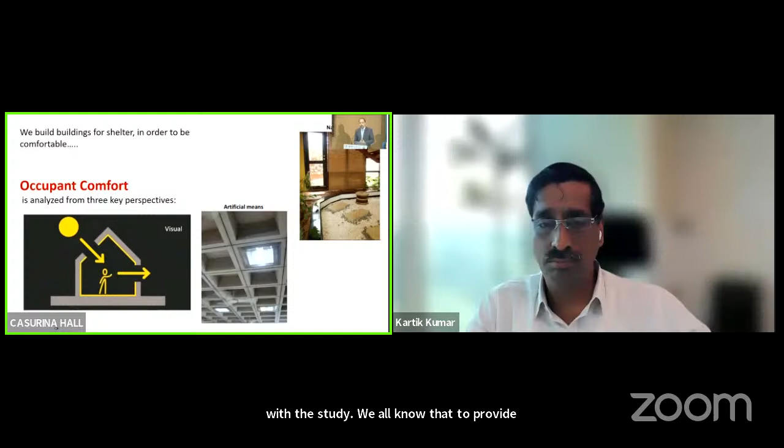Developing this daylight plugin tool with the measured sky condition of India is particularly the main intent and objective with which we started the study. We all know that to provide occupant comfort, visual comfort is one of the key components we have to address in a building, and it is addressed through two means: one is artificial lighting, and the other is natural lighting, which we get from the sun.

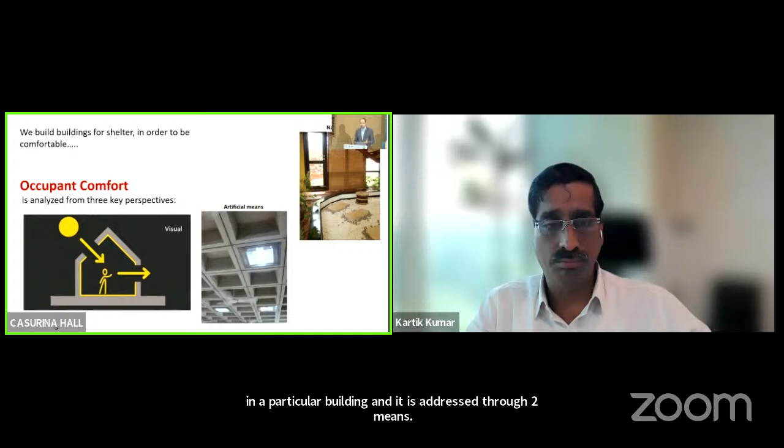We have seen in the past from our vernacular architecture that this was very well addressed in our buildings, where daylighting was the key source and we didn't have artificial lighting. It has just been 100 years since we were introduced to artificial lighting, but before that, daylighting was something which was very well addressed.

Now, since we have the option of artificial lighting, we have started exploiting it, and we have started creating buildings full of glazing, without realizing what the interior spaces are going to be like and how they will behave in terms of our own internal comfort requirements.

In some parts we find that places very close to these glass facades have ample daylight, whereas in certain cases the lighting levels are very low, so you need to turn on artificial lighting systems, or turn on the blinds because the daylight levels are quite high.

Under such a scenario, what ultimately happens is that we are leading up to sick building syndrome. I believe more than 50% of people will be consuming vitamin D tablets every week, and the major reason is that our exposure to sun is now reduced very drastically, because most of the time we are indoors in our offices and schools, where we do not get this exposure to daylight.

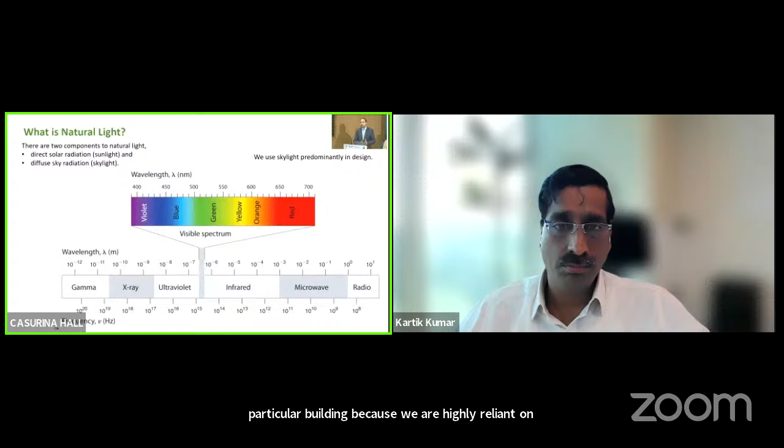This is certainly leading to a detrimental impact on our health. At the same time, it is also increasing the energy consumption loads of our buildings, because we are highly reliant on artificial lighting systems. Now we need to first understand the physics behind this: what is ultimately happening, what is the main source or cause of the problem, and how we can find a solution.

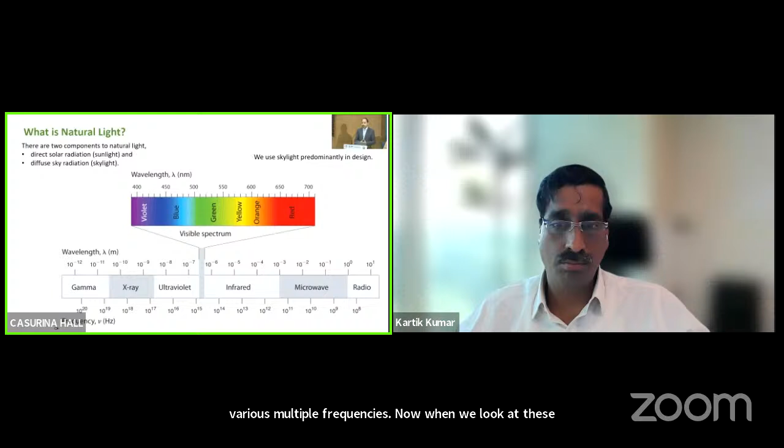When we look at the natural light coming down to us from the sun, these radiations are divided into multiple frequencies. There is a very small window known as the visible spectrum, also known as VIBGYOR. This is the only visible spectrum, a very small window, which carries daylight.

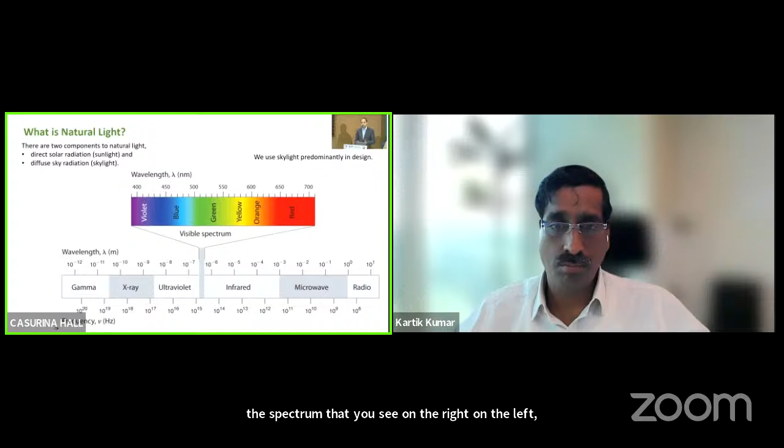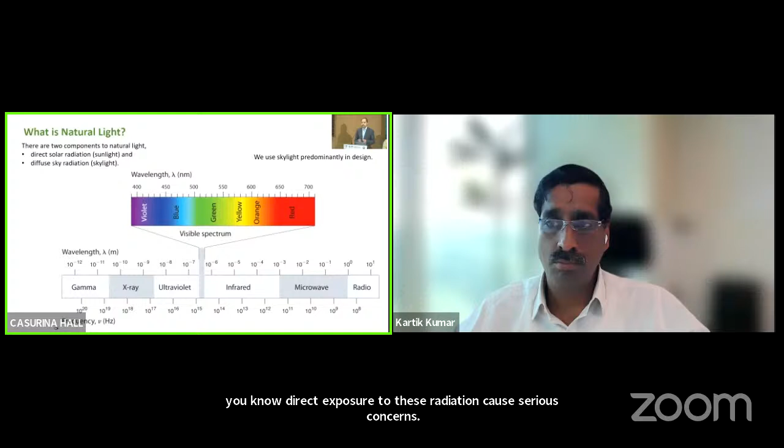Apart from that, the spectrum you see on either side - gamma rays, X-rays, ultraviolet rays, infrared radiation, microwaves - we all know these are very harmful radiations, and direct exposure to them causes serious concerns. They also carry a heat element which gets trapped in our buildings, and to exhaust this intensive heat we are reliant on air conditioning systems.

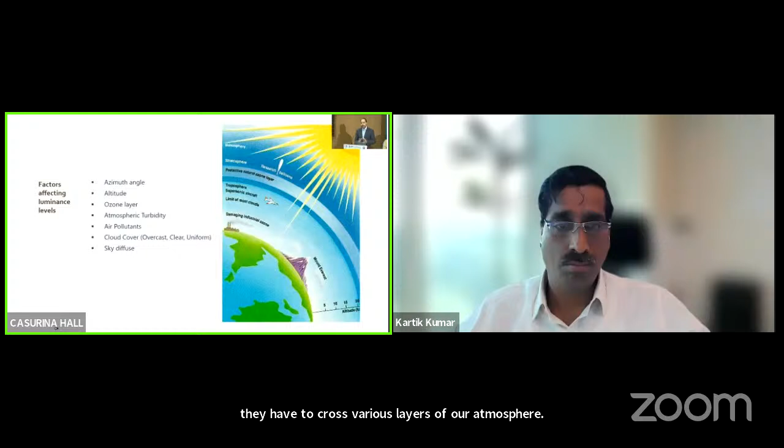Before we move ahead, we need to understand that these radiations, when they reach our interior spaces, have to cross various layers of our atmosphere. Some of these atmospheric layers are natural, and some we have created ourselves in terms of pollutants and turbidity, whereas the natural filter layers we see are ozone layers, diffuse sky, etc.

Now, the first layer which these radiations cross is basically the sky dome, the sky. We have to understand that whenever we observe the sky for just an hour, you will find that it is very dynamic. It changes very quickly. So that certainly means we have to understand this data and integrate it into our design, which was something very well addressed by the designs in our vernacular architecture.

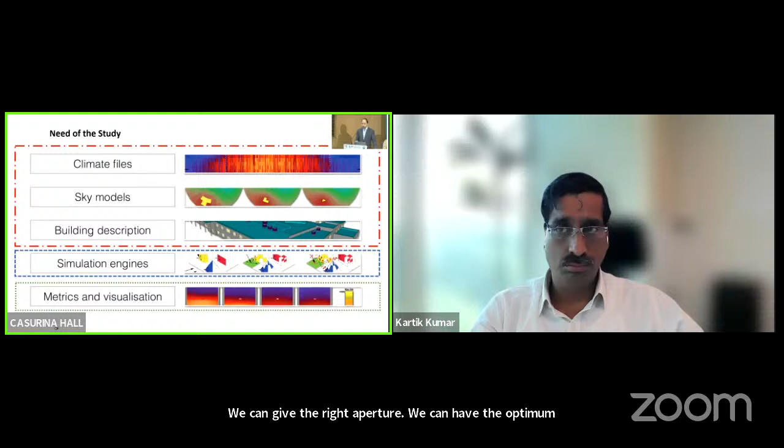Now, in this contemporary world, when we start evaluating or building up our buildings, we take help from simulation tools to assess the daylighting availability in our spaces, so that we can select the right glass, give the right aperture, have the optimum window to wall ratio in our buildings, or in some cases provide skylight in our buildings.

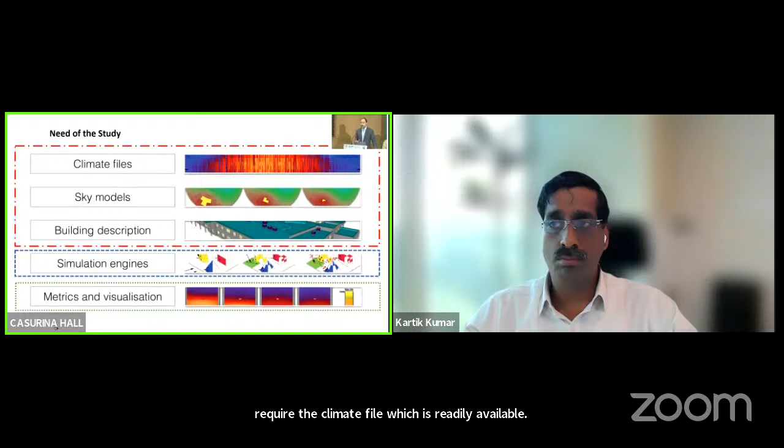So for that, the ultimate requirement to model these into our softwares is that we require the climate file, which is readily available. We need the building description, which we eventually have at the planning stage. Now comes the sky model component.

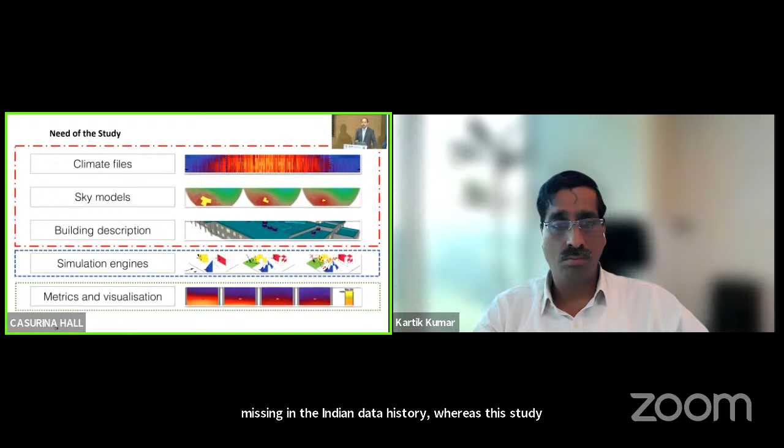This sky model component was something missing in the Indian data history. This study started off 40 years back at CBRI Roorkee, but unfortunately it could not escalate, and this study had to pause at that point of time in India. Whereas other countries took this particular study and started developing their sky models, in India we didn't have a sky model, and till date, till 2020, we didn't have anyone.

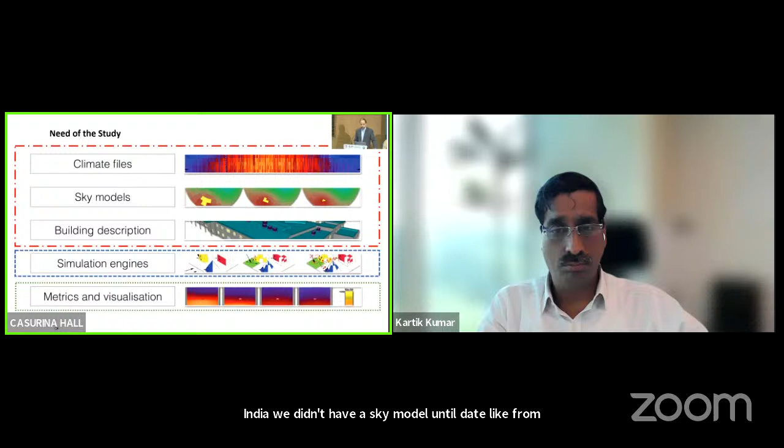So our intervention came in where we started identifying the sky model of India, because that is the first layer which we need to cross.

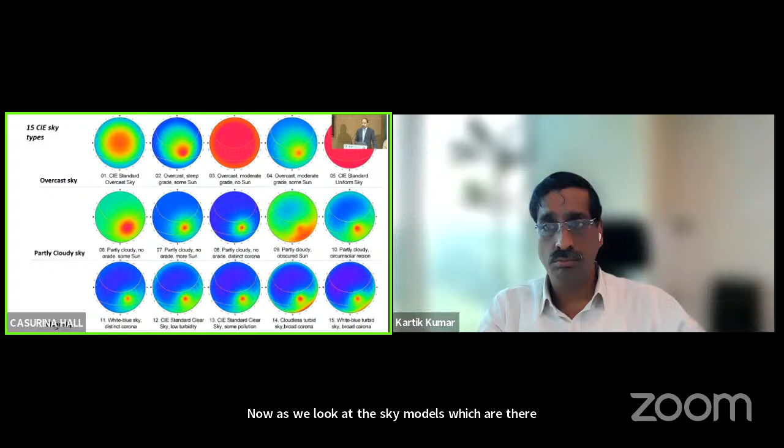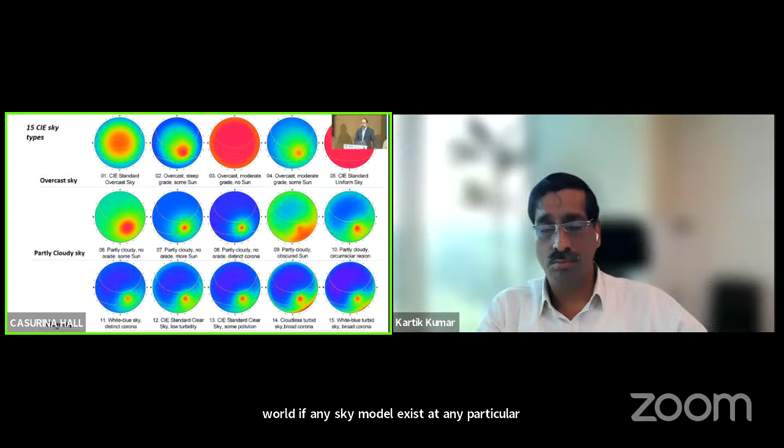Now, as we look at the sky models persistent in the world, the CIE, which is the International Body for Illumination, has defined 15 sky models in the world. It says that in the entire world, if any sky model exists at any particular geographical location, it has to be from these 15 models. These 15 models are further subdivided into 3 segments: overcast sky, partly cloudy conditions, and clear sky conditions, each further divided into a band of 5 models.

In the year 2015, TERI took up this particular study where we successfully completed our first phase, and launched a booklet for this in the year 2022. We then ventured into the second phase where we collaborated with SSN Chennai for this particular study.

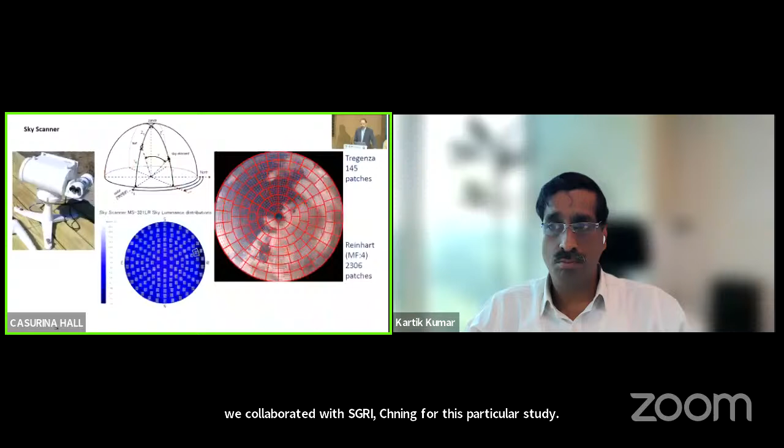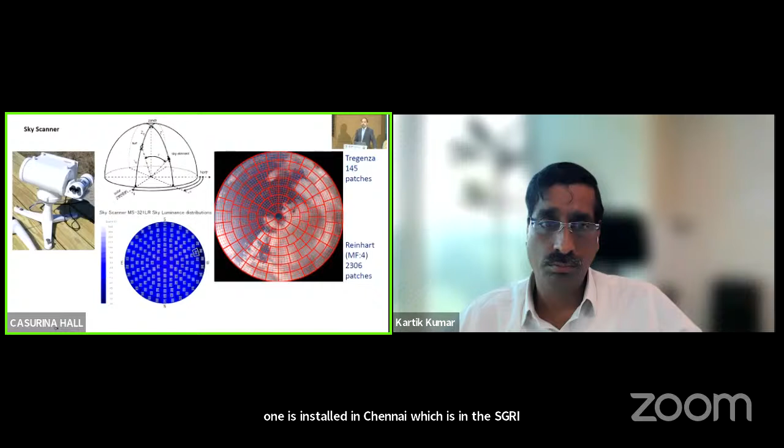For conducting this particular study, we have installed one of its kind sky scanner in India. There are 2 sky scanners installed in the country: one in our facility in Gurugram, and the other in Chennai, in the SSN facility. This particular sky scanner captures the entire sky dome within 10 minutes, and it captures the luminance data in 145 patches.

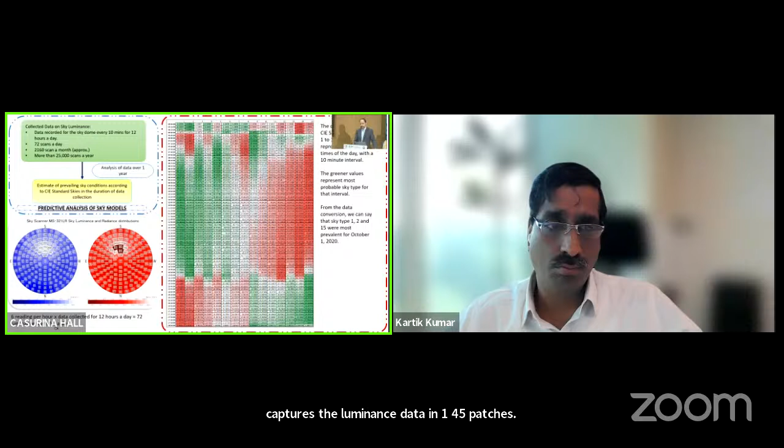Once this data is captured, we integrate it into an ISO defined methodology, again defined by CIE, and we convert this into the exact sky model which is persistent at that point of time.

Until now, we have been able to identify that for Gurugram, for the last 4 years, this is the sky pattern that we have observed. And for Chennai, this is the data recordings that have assessed us that the sky pattern of the particular location is sky type 14.

This particular data is being made available in the public domain on the MTCOE website. In case you wish to further investigate and know about the sky models, you can refer to the MTCOE website.

To further move ahead, we have also done a lot of validation studies, both at our Gurugram facility as well as in SSN Chennai, where we are continuously monitoring the lux data and validating it with the simulation results. Until now, the studies have found that by using the actual sky model, your accuracy increases by almost 24%.

We are also doing parallel assessments of Delhi and Gurgaon data that we have been able to capture till now. With respect to that, we have published 3 papers till now in international conferences about the study that we have done, and we have more to come. This is just the start.

Now comes the main important component where this entire data is now going to be integrated. These are some of the prominent daylighting softwares which are right now available in the market, on which designers, architects, and green building consultants perform their daylighting assessments.

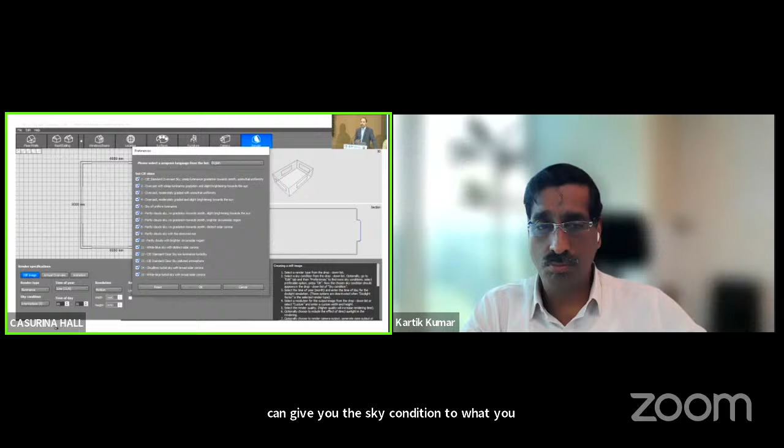We have investigated that only one software is currently available in the market, which is VELUX Daylight Visualizer, which offers the option to select the sky condition of your own type. Apart from that, there is no other software which can give you the sky condition you require to assess.

Under business as usual, the simulation conditions we consider are the overcast sky scenario. But what we just saw on the previous slide is not so the case. That certainly means the analysis we are doing is not accurate, or not closer to the required level of accuracy.

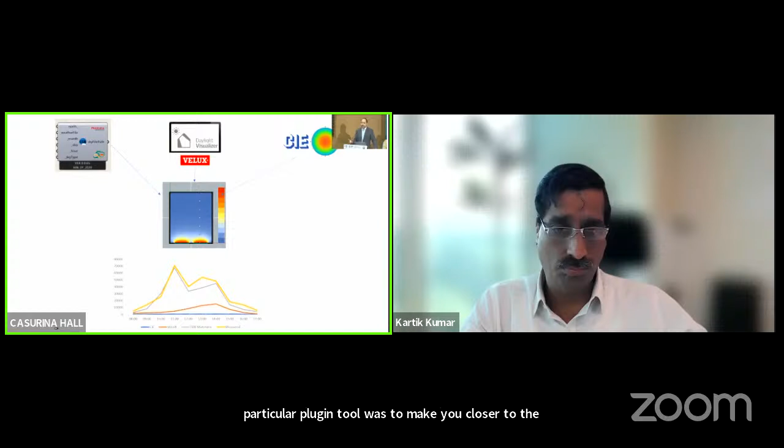The objective of this plugin tool was to bring you closer to the accuracy levels of the exact luminance levels you are trying to achieve in your spaces. The tool we've developed, and the data we've collected, will be further integrated with other software available in the market, so that daylighting accuracy increases every year with the data we capture.

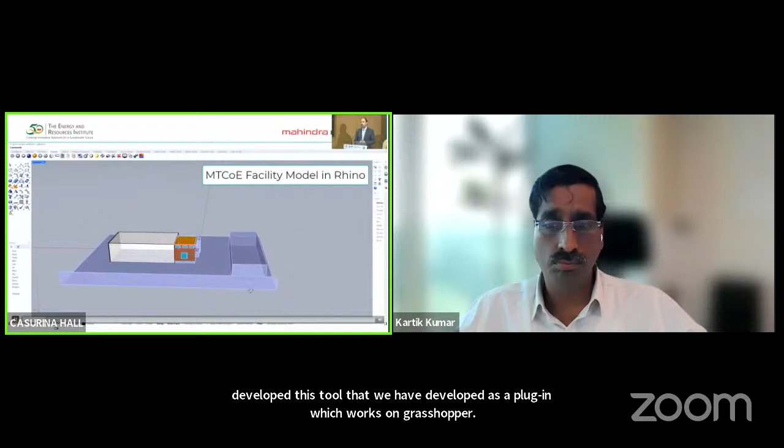I'm going to take you through a small video demonstration of this tool. This tool we've developed is a plugin which works on Grasshopper. You just need to model your particular building object in any 3D modeling software tool, and then import it into Rhino.

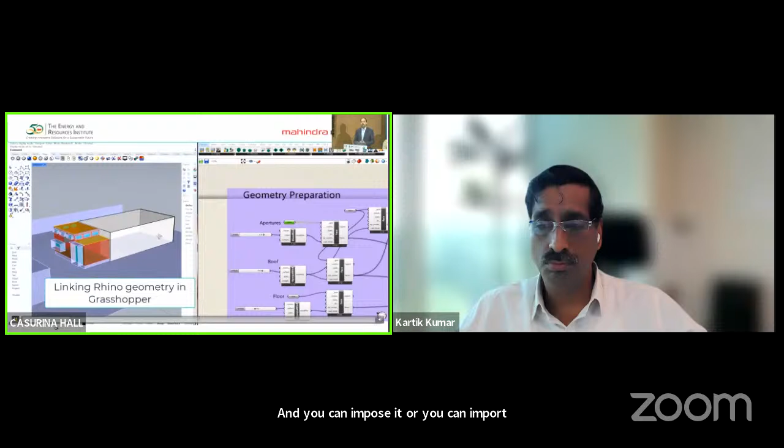Once imported, you need to open Grasshopper and assign the material reflectance value of each part of your project, such as walls, roof, surfaces, windows, etc. After that, you need to integrate the grid where you will perform your analysis, which could vary at any particular height you wish to analyze.

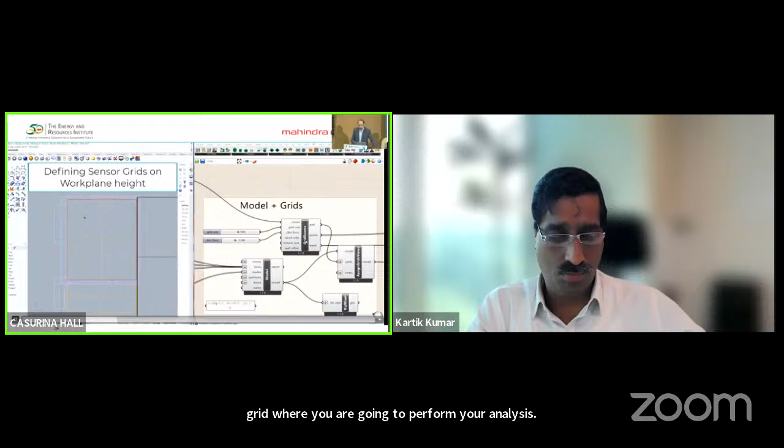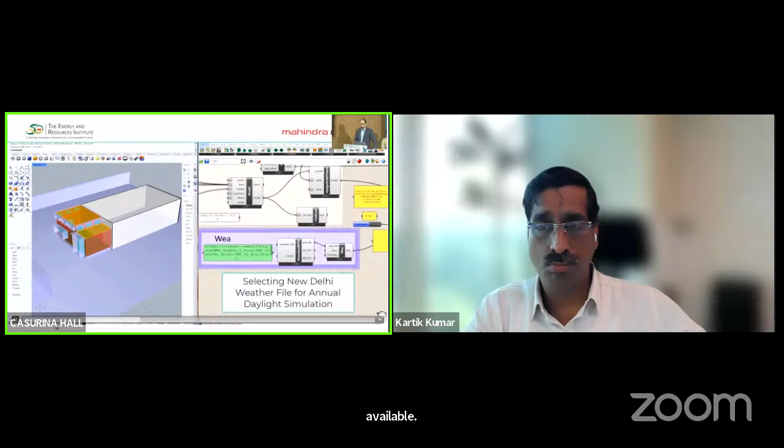After doing that, you need to integrate the weather data file, which is readily available as a Wea file, and is also used for energy simulations. You need to integrate this weather file into the plugin tool.

Into this plugin tool, we have created our recipe, our data set, which we have converted into RGB modules. We could not do this alone; we took help from GIZ India, who helped us in defining this entire process.

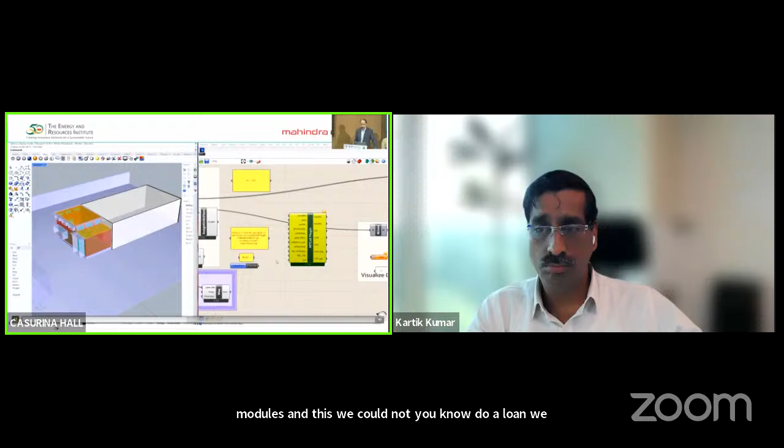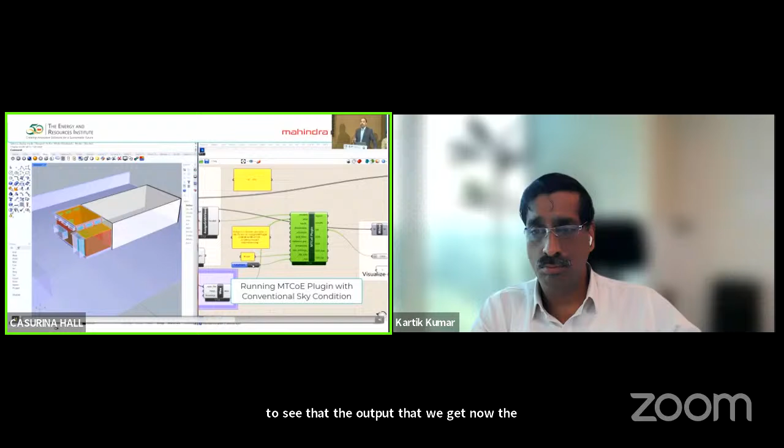When we integrate our intervention data into this plugin tool, the results completely change. You integrate the weather file and our data, and you will see the output in daylight autonomy or UDI, which works on the concept of climate-based daylighting modeling, an annual analysis. So we are not just talking about a point in time, but annual analysis.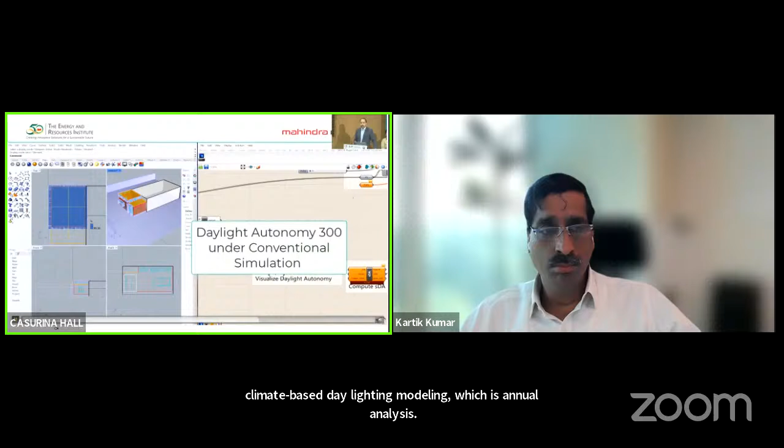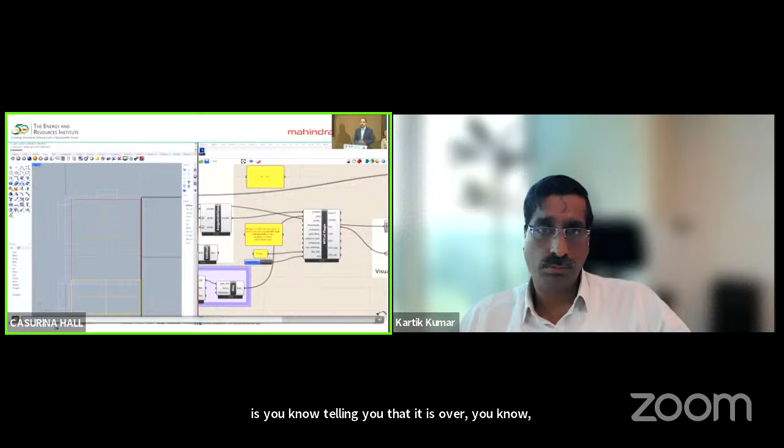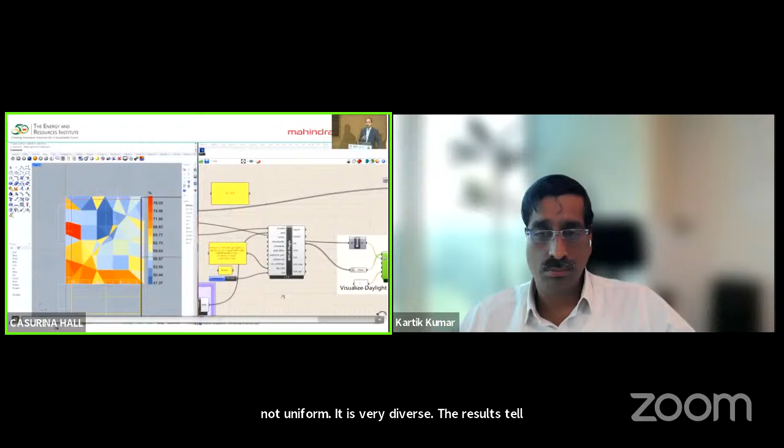Once we see the analysis from the usual case, it tells us there is uniform illuminance distribution in a particular space. But when we integrate our measured data into the analysis, we find that the sky pattern shows results where the skylight is not uniform. It is very diverse, and the illumination pattern in your space is not uniform.

It is very undefined. This kind of analysis helps us define the right scale. As you can see on screen, our results are very close to the actual measured values, whereas the business as usual practices are no longer close to what the actual reality is.

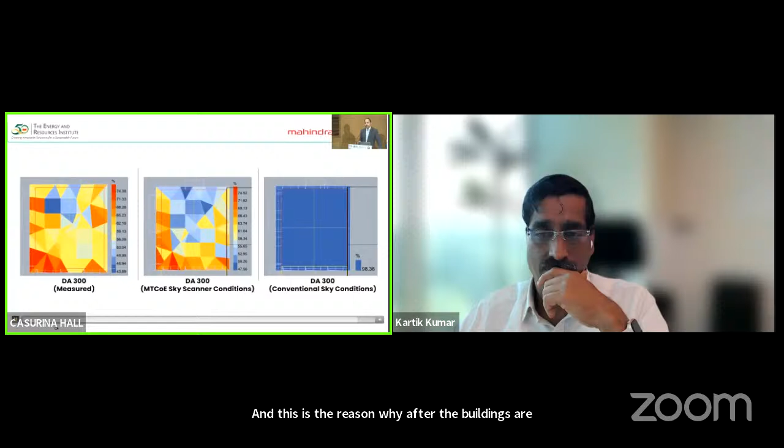This is the reason why, after buildings are delivered, people face problems of visual comfort, and that is where we intend to ensure that the buildings we design are intended to meet the purpose of visual comfort. With that, I thank you all. Thank you.